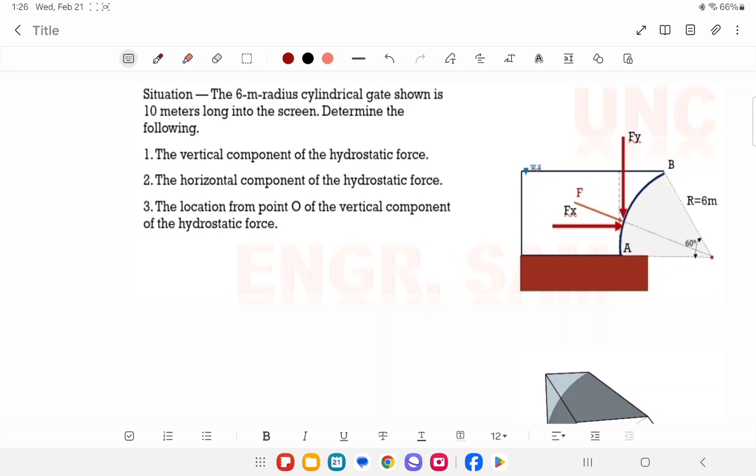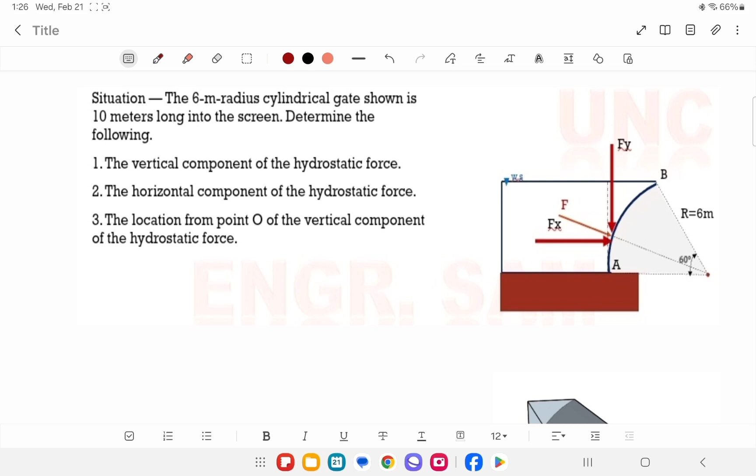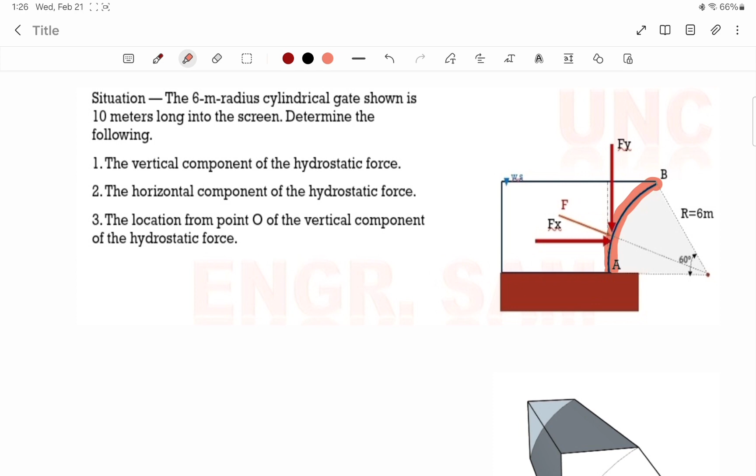So another example for the hydrostatic force in a curved surface. We have here a situation: a 6-meter radius cylindrical gate. This is our gate, shown 10 meters long into the screen. We'll elaborate later. Determine the following.

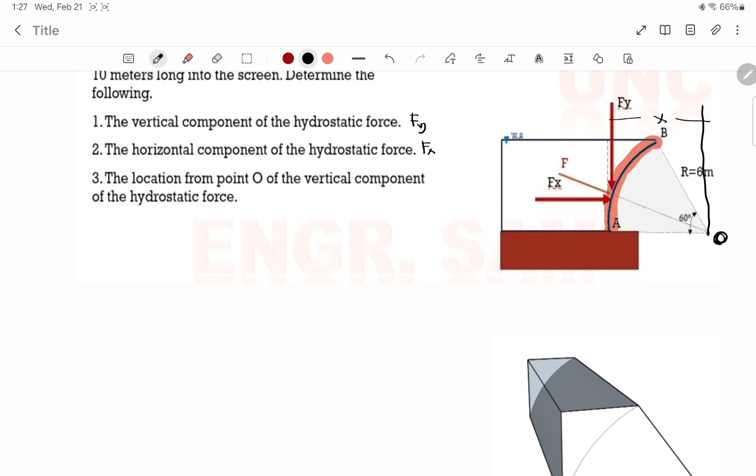First, the vertical component of the hydrostatic force, FV or FY. Second is the horizontal component of the hydrostatic force, Fx. And then the location from point O, which is here, of the vertical component of the hydrostatic force. So our vertical component FV or FY extends to here, let's call it X.

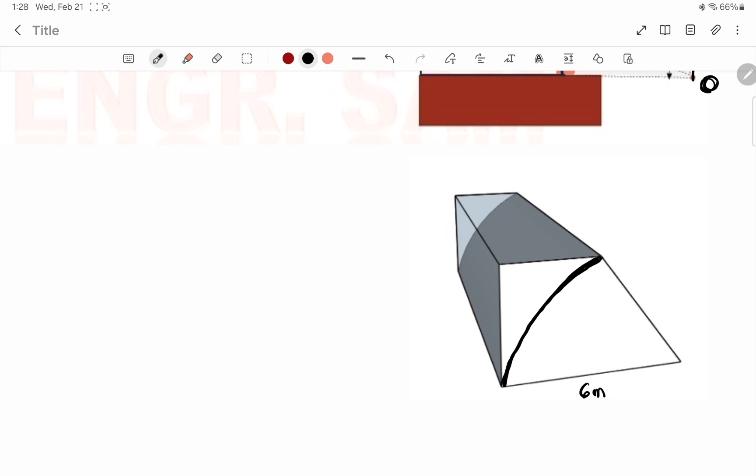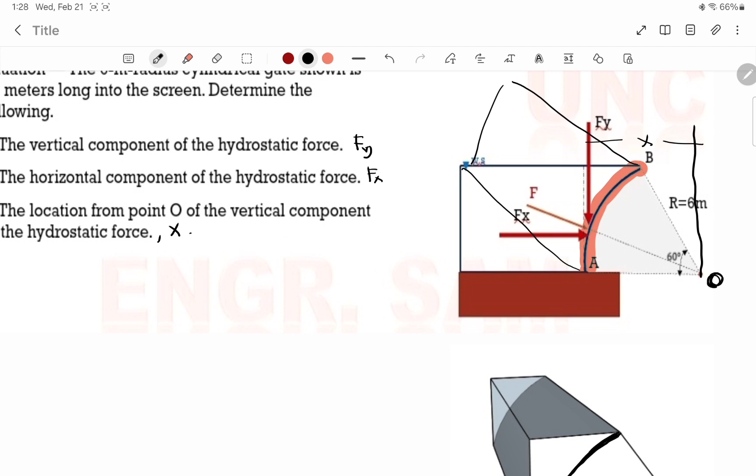So this is the 6-meter radius gate. It's a cylindrical gate, with point O here, and the 10 meters into the screen. If we make this figure 3D, we extend it like this. So this is the result - this is the 10 meters into the screen.

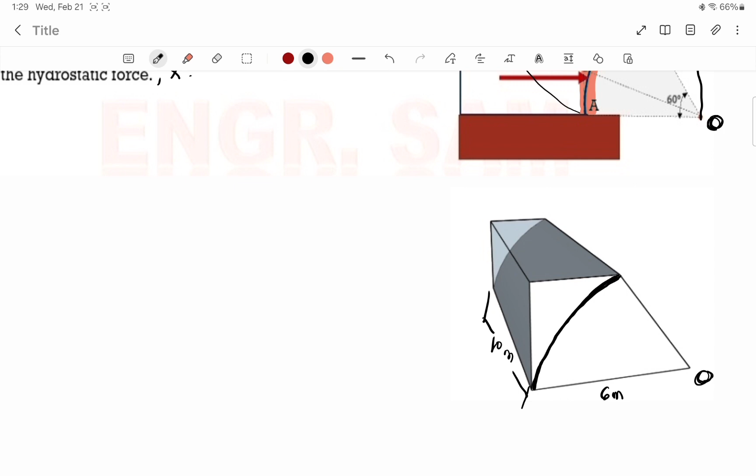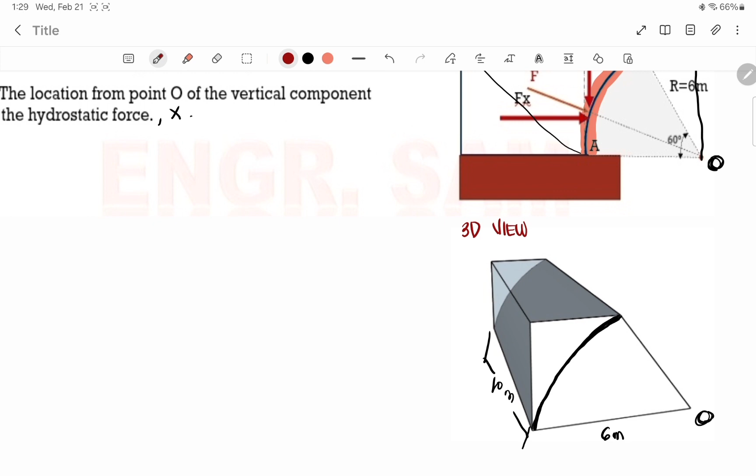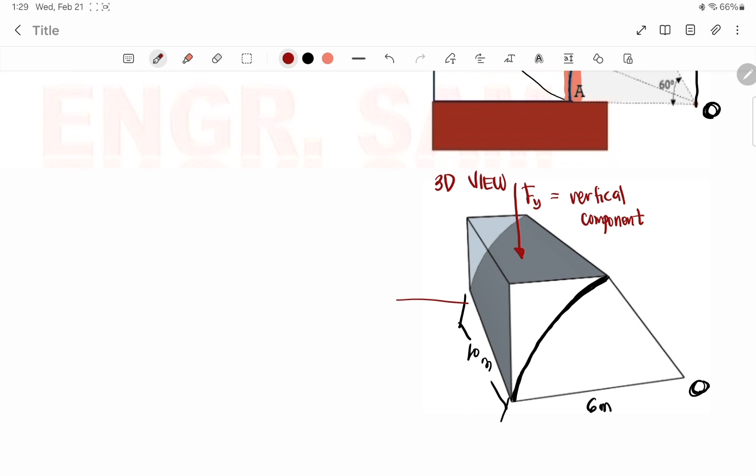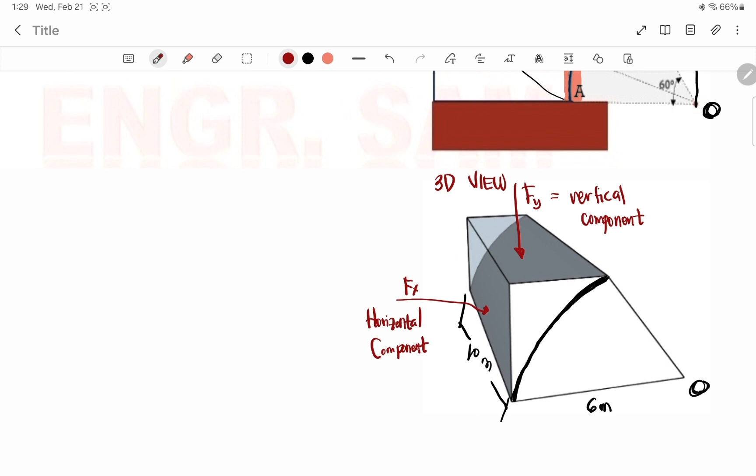This is now the 3D view. So you should imagine the orientation of this figure, or even without a figure, you should be able to imagine the actual gate being analyzed. So we have here FV or FY - this is the vertical component. And this is Fx, the horizontal component. I hope you're following. That's the analysis. So this is the 3D view.

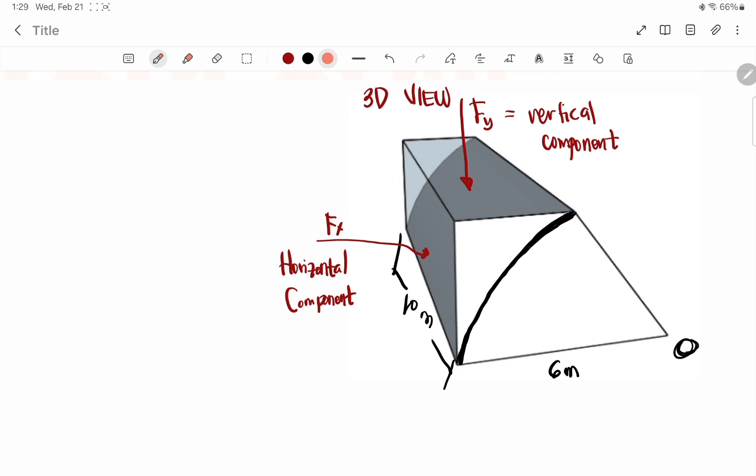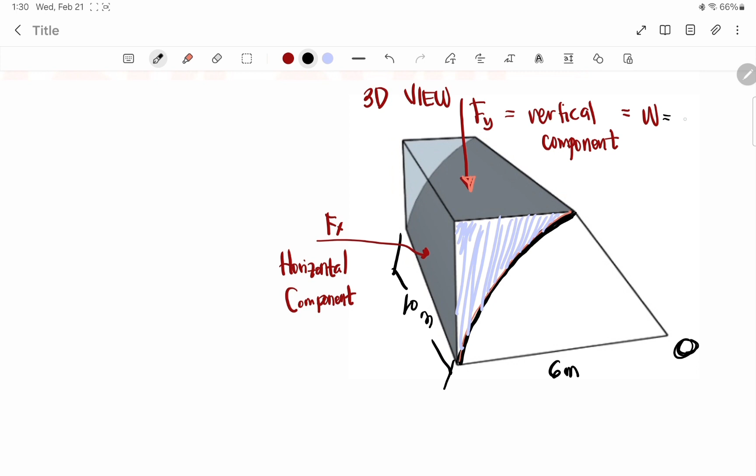From what we discussed last meeting, for our Fy, what we need to get is that it is also equivalent to the weight of the fluid projected above. So let's say this is Fy. We analyze the weight sitting on top of the curve, meaning on the gate. This is the weight. So the weight is equal to gamma of the fluid times the volume.

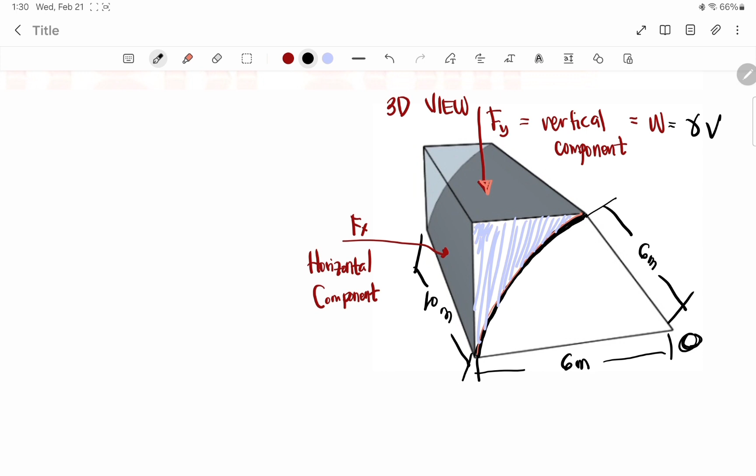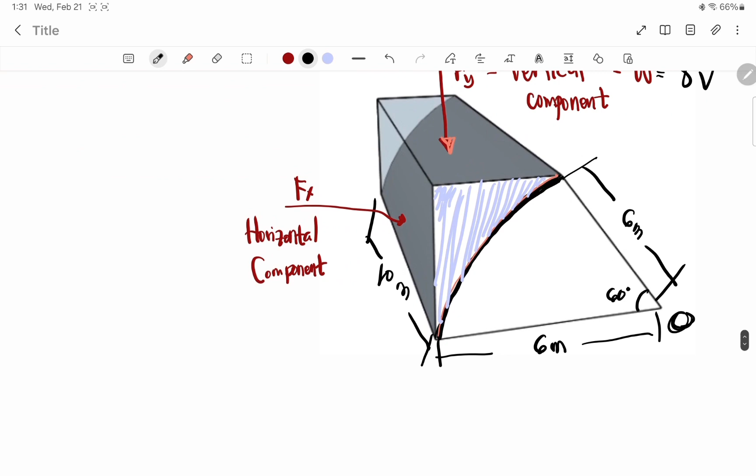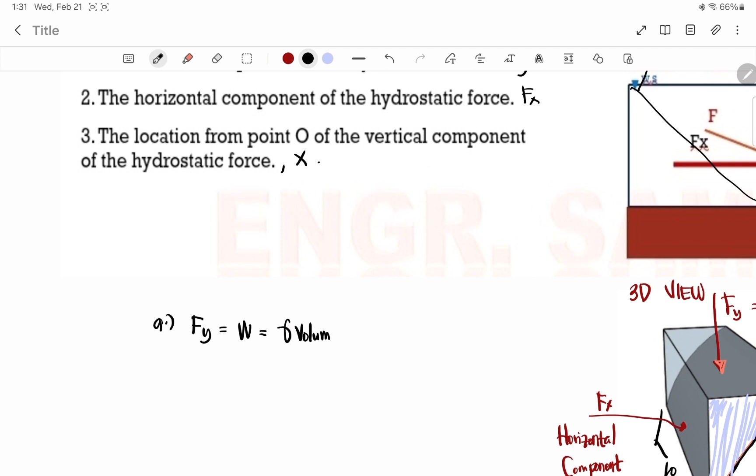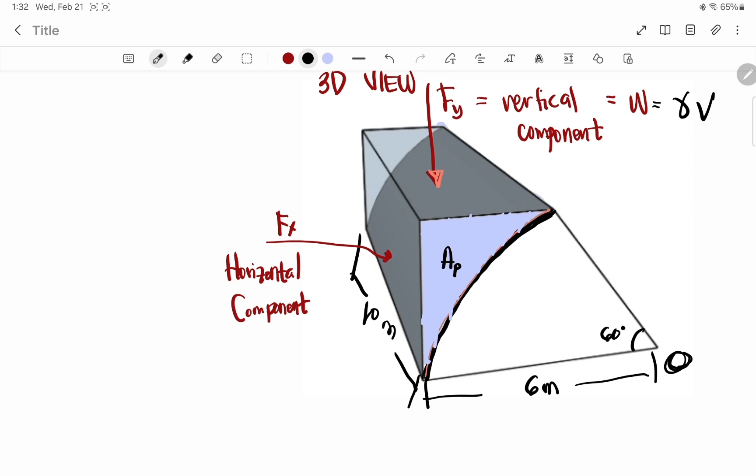Vertical component Fy is equal to gamma times volume, or W equals gamma volume. Gamma of water is 9.81 kilonewtons per cubic meter. We're just missing the volume. The volume we're looking for is this - this is the area, and this is the length of 10 meters into the screen. So area, AP or the area projected, times this length of 10 meters - that's how we compute the volume.

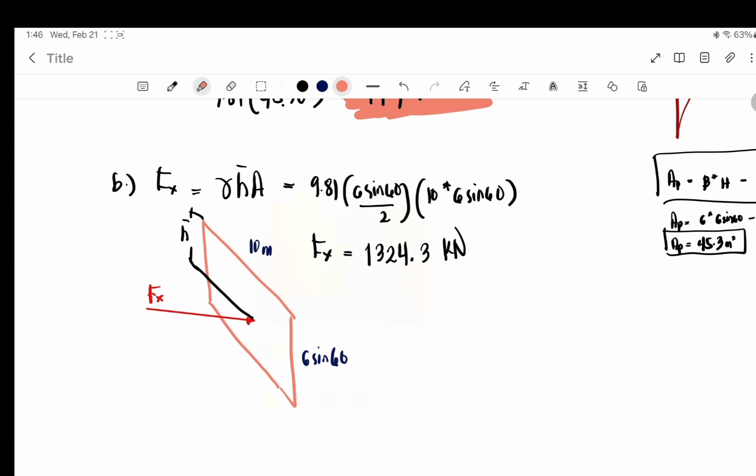Ay pangit, parang dinuguan. Wala. Para cute.